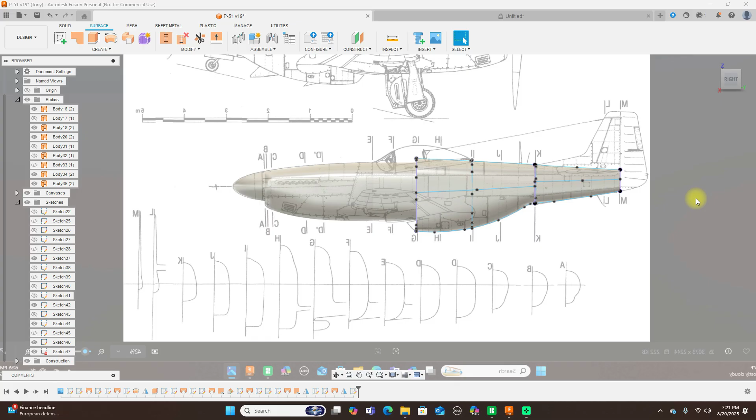Today we're going to be surface modeling this P-51. Earlier last year I showed you guys how to model a P-51, some of it, but I didn't finish it because I really wasn't happy with it. So I went back to model this one, and I'll show you guys how to do this up to where I've gotten so far. This is the hardest part right here, which I'll show you how to do in the second video, because it's going to take a little while to get this shape. So this is what we have so far.

Okay, let's go ahead and get started here. So we have the picture in here already. Now we don't want to put all these formers in here, because the more you put in here, the transition from one former to another won't be as smooth as it really should be. So what we're going to do is put A, C, D, and then probably put F in here to get this front section. So let's go ahead and do this.

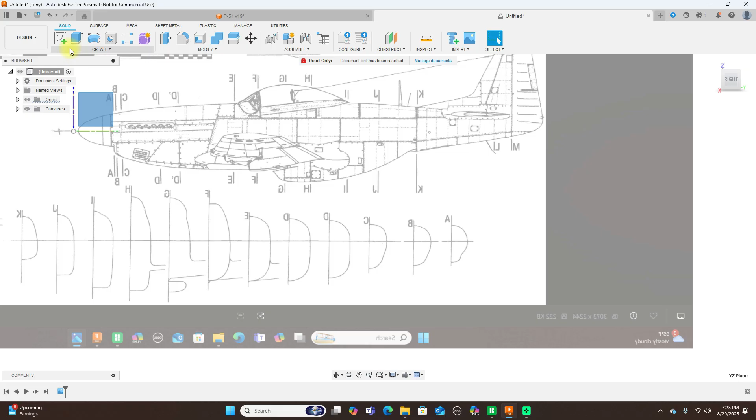So I'm going to create a sketch on this plane here, and sketch a line. These plans are not perfectly lined up, as far as perpendicular and stuff like that. Some of these formers are not like that, so just keep that in mind if you use the same set of plans I'm using.

Also, don't put as many points in here like I'm doing. Like I said, when I do this, it's just for speed, and that's it.

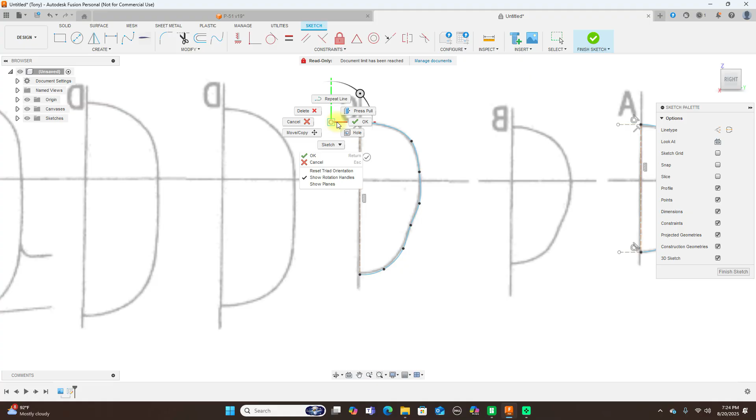Then I'm going to do C. Then D, I'm going to put the back one here, a D, not the front one.

And like I said, these are not completely lined up because this line is vertical. You can see this is not the former, is it?

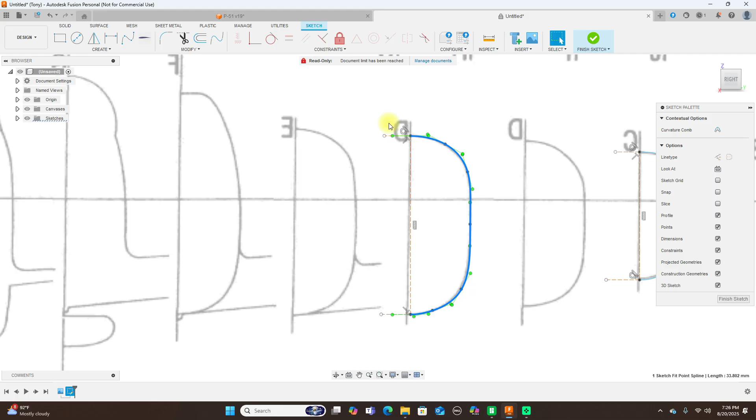Then I'm going to put this one all the way back to F here. Since the canopy is going to be done later, I'm just going to put a line from here to the bottom down here. Then move this down to here.

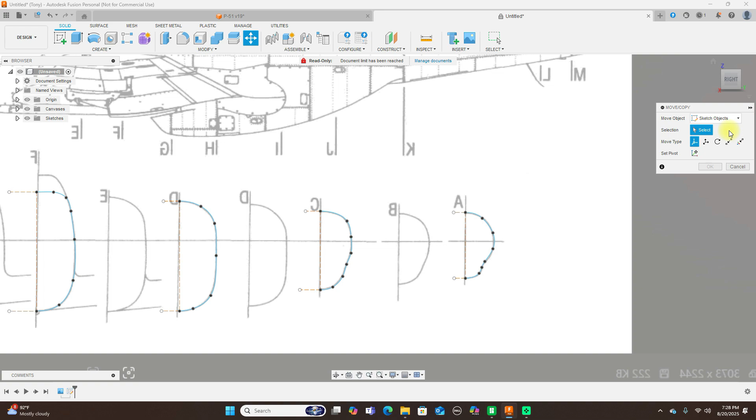And there's our first 4 formers. Then finish sketch. Then I'm going to move these, zero this out over here, and make sure to select all the geometry, and also make sure that you select this as the center.

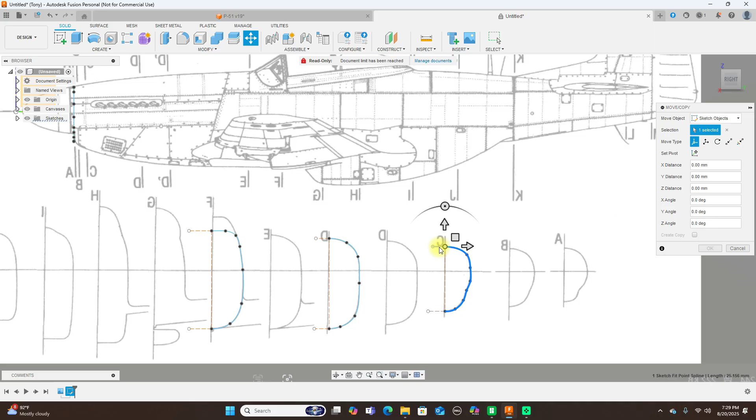Same thing with C here. Then D. And F.

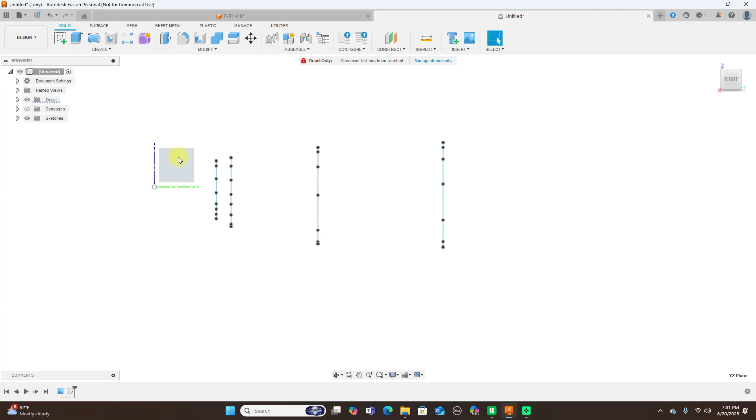And here's the shapes, our splines so far. Create a sketch on this plane here, then we're going to project points, and click OK.

I don't know why I did that. We don't want this.

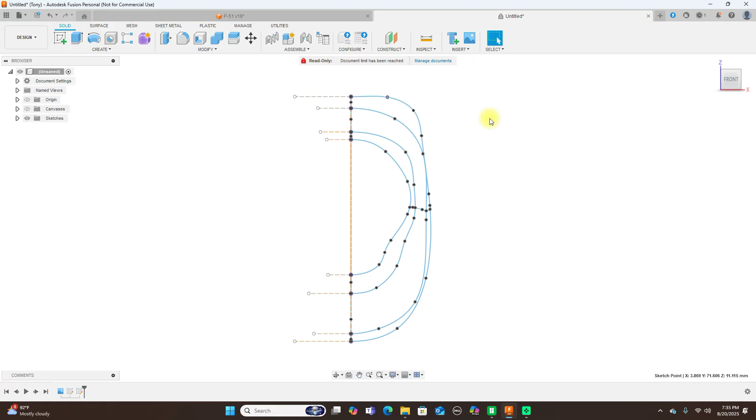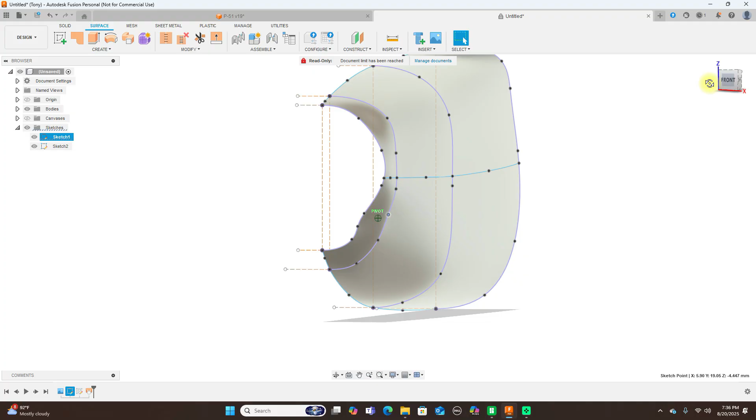Now let's see what this looks like. Zero this out. Then add rails. And this looks pretty smooth, and that looks pretty good.

Now I'm just straightening some of this stuff up to make this look smoother. As you can see, it's looking a lot smoother now, the transitions and things. So what I'm going to do now is the spinner.

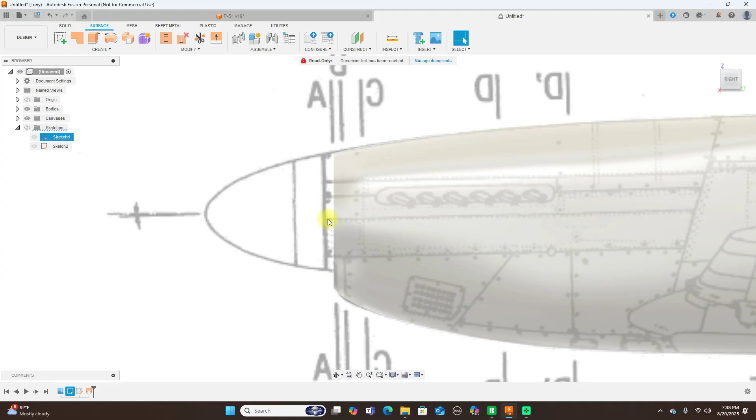Now the spinner starts up here, and if you notice, I didn't extend this up through here. The reason I did that is because I can make this whole thing, the spinner, then cut this, split this, and then attach this front to here.

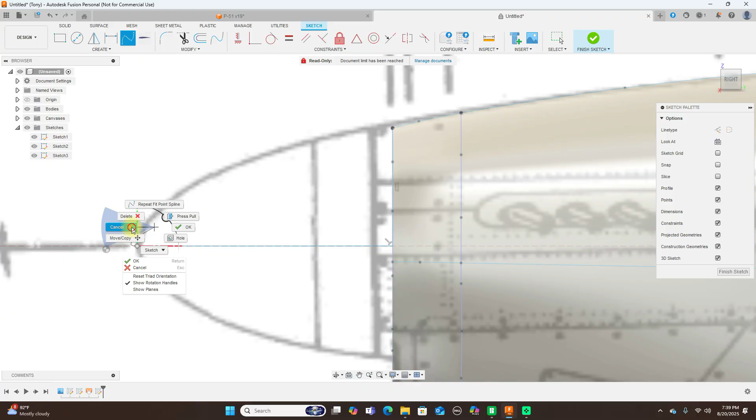So, create a sketch on this plane here. It's a spline tool. Finish sketch. Turn the sketches back on. Then we'll use a revolve.

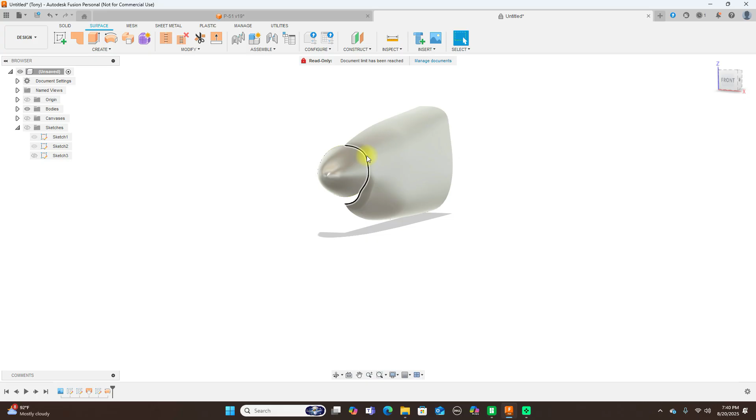Then what I need to do is come back in here and move this to match this up front. It looks like a little face in there.

Now I'm going to mirror this piece here, and we have the front of this P-51.

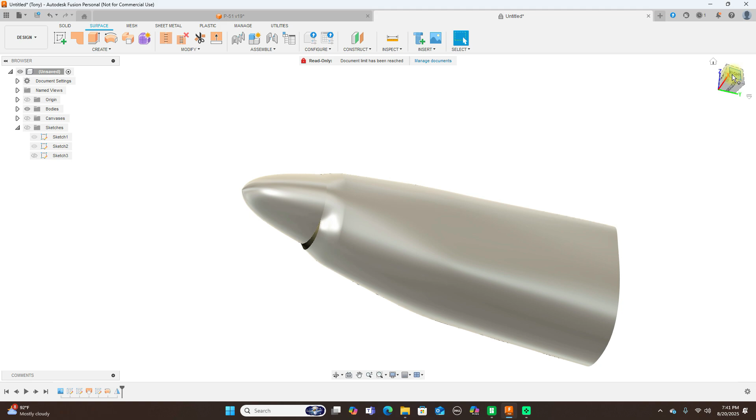Now what you can do is put more rails in here to pull this out a little more and to give you more control. You can put one down here too, 2 more rails to give you more control. But this is how you go about doing this.

And if you notice too, something that I do, let's go back to the sketches, turn the bodies off. We have our sketches here, and you see these lines here, and I make these tangent all the time, you know, to the profile shapes.

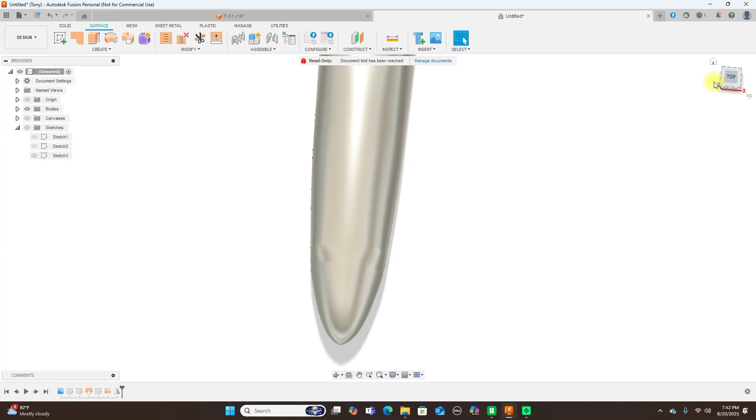And the reason I do that is because when I loft, or mirror the shapes over, it gives you a nice seamless transition like here. Even though these are 2 pieces, you don't see a line in between here. That's the reason I do that, so that it gives you that nice smooth transition. It looks like one piece.

And I'm going to put a rail up here, one more rail, and see what this looks like with another rail. If I don't like it, I'll just take it out. Well, it doesn't matter, I've already lofted.

So create a sketch on this plane here, and put one right up in here.

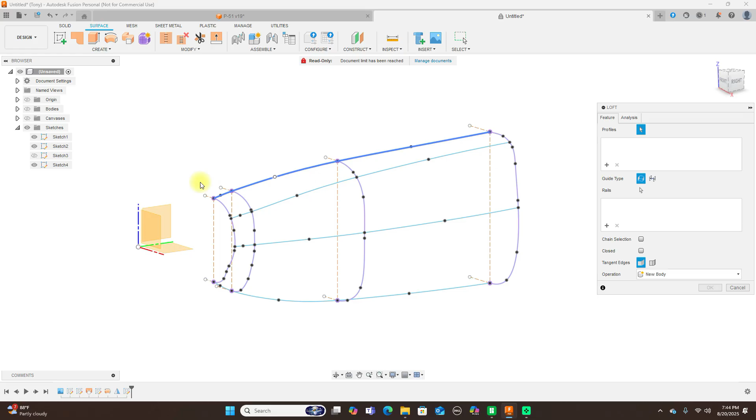Okay, let's look, see what this looks like now. Zero this out again. Okay, that's a little smoother through there. Excuse me.

Now I'm going to put another one down through here. So I'm going to delete this, go back here, and edit this sketch.

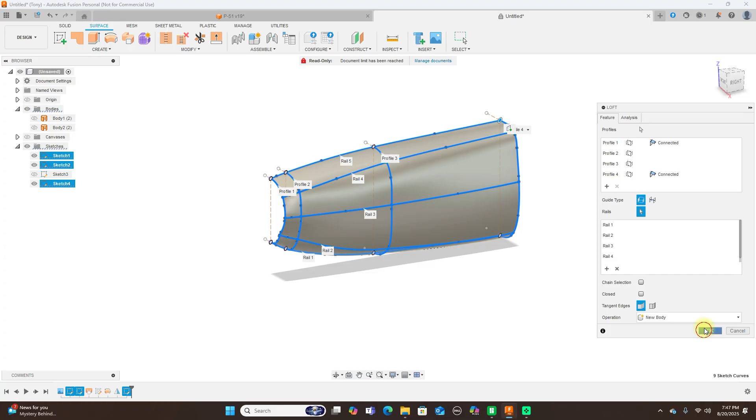Okay, finish sketch here, turn the sketches back on. Then add the rails. And that looks good too.

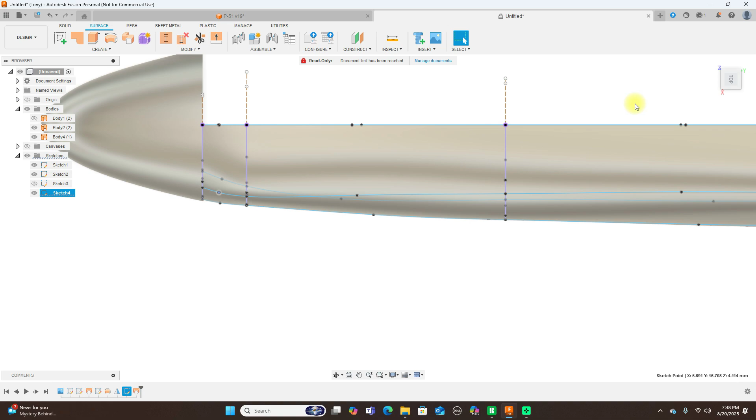And that looks really good now. Now I'll go ahead and mirror this again. Now we have that nice shape of that P-51.

And like I said earlier, you don't need all the formers. The less formers you use, the smoother your shapes are going to be. And I only use 4 for the front here.

Now what we can do here, let's see, the shape here to here, and from here to here. Let's see the best way we can do this.

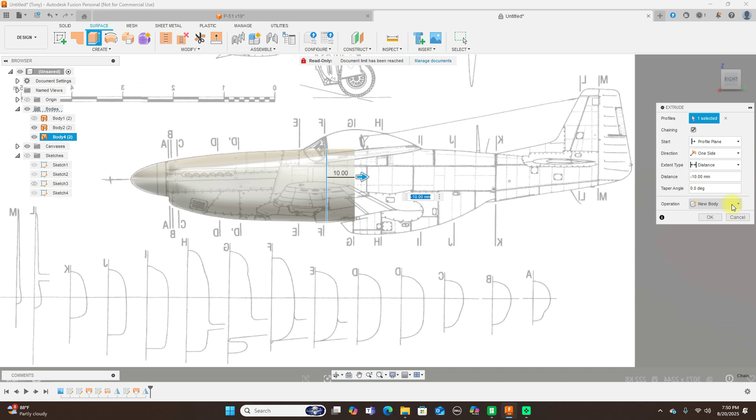This profile here back to there. And we have that now. And that looks really good too.

Now H is this one here. And I don't want to put the canopy in here.

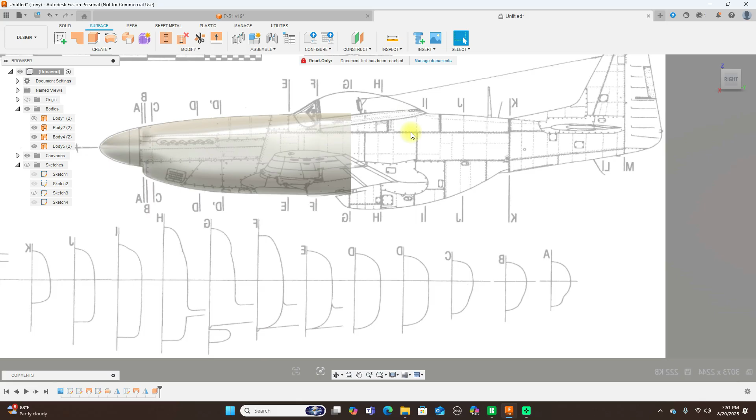So what I'm going to do is just draw a line on this plane here, or sketch a line. H is, imagine this coming straight back here, and down to here. Then moving this down to H.

And I'm not worried about the wings right now, so don't put that in there at all.

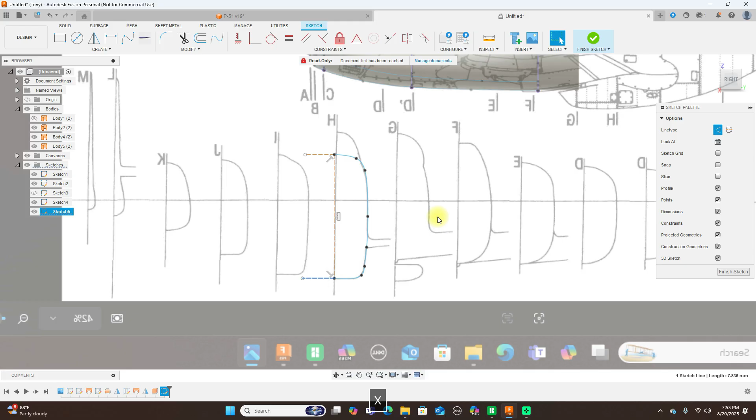Finish sketch, turn the sketches back on, and then we're going to move this. Select all the geometry. Then move this up here.

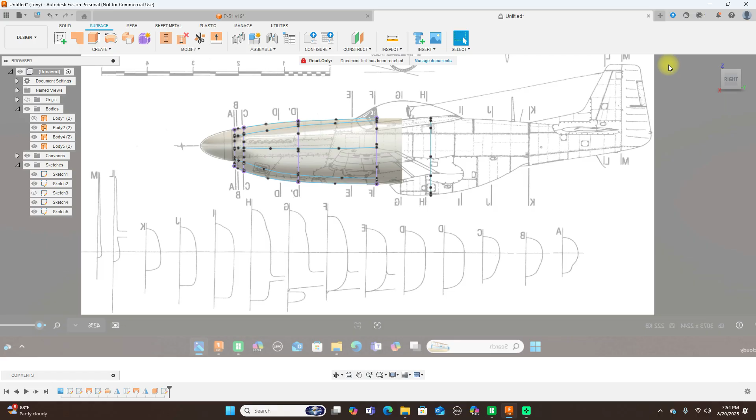Turn that piece off for now. Now what I'm going to do here, I'm going to use a plane at an angle, use this, click OK.

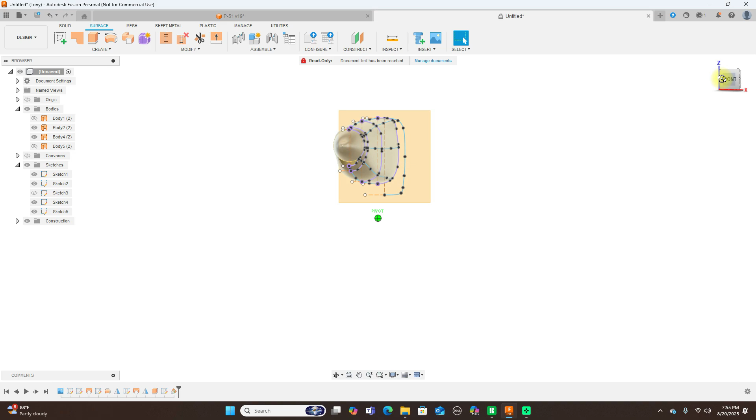Then I want to project this onto the plane. Click OK.

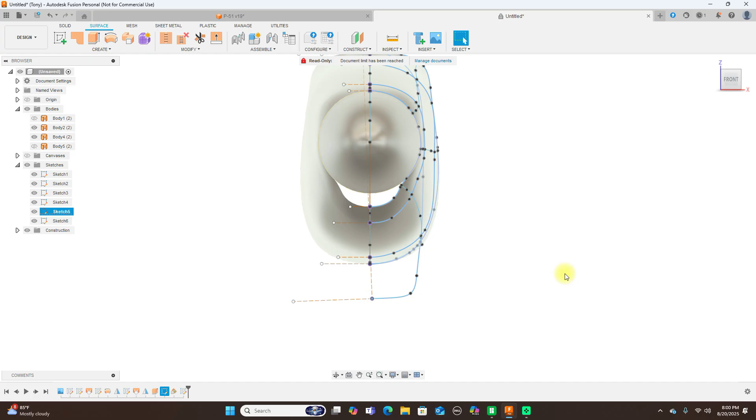Okay, let's see if we can loft this now. Don't want the whole thing, and it won't let me do that.

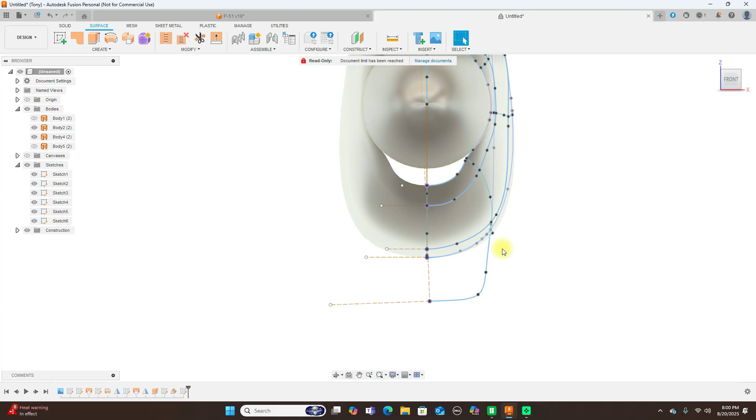So what I'm going to do here is just sketch this.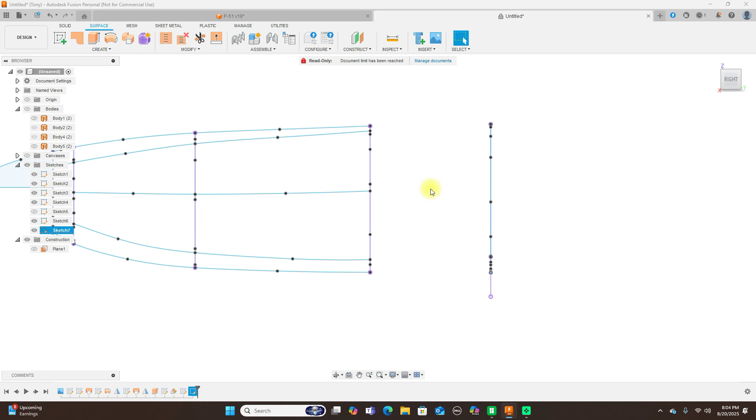Okay, now we have that. Turn those sketches back on.

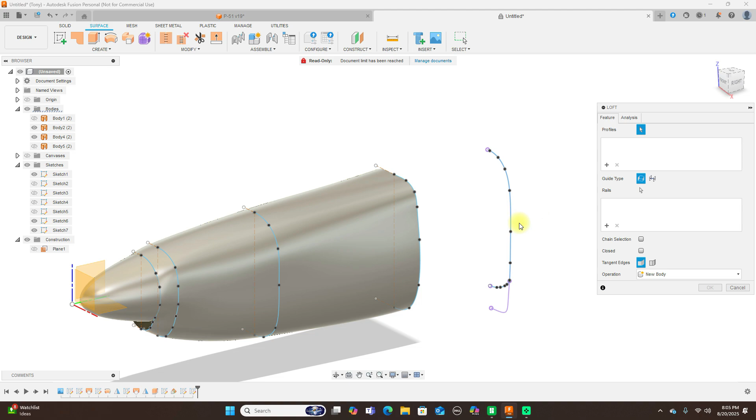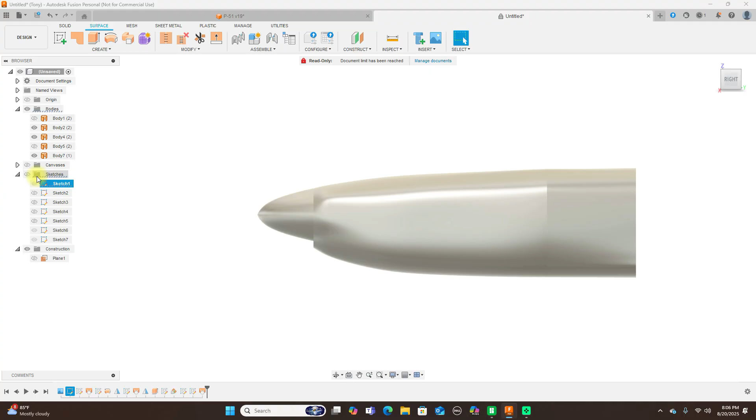Now, you can see we need some rails in here. Maybe not. Okay. And this is our P-51 so far.

Mirror that. And move back a little further. And now I'm going to put K in here.

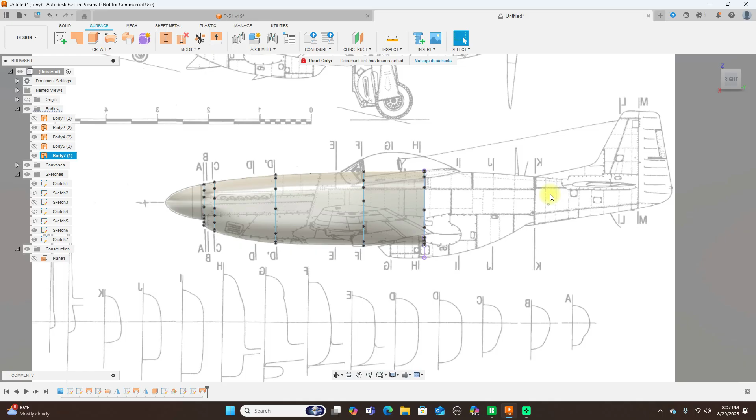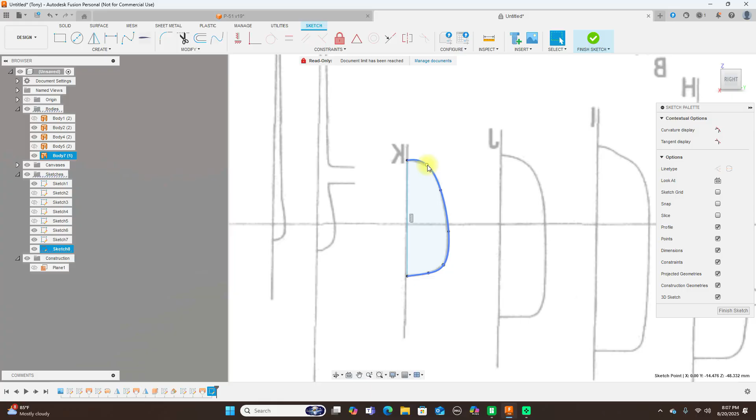So create a sketch on this plane here. Sketch our center line. Then move this.

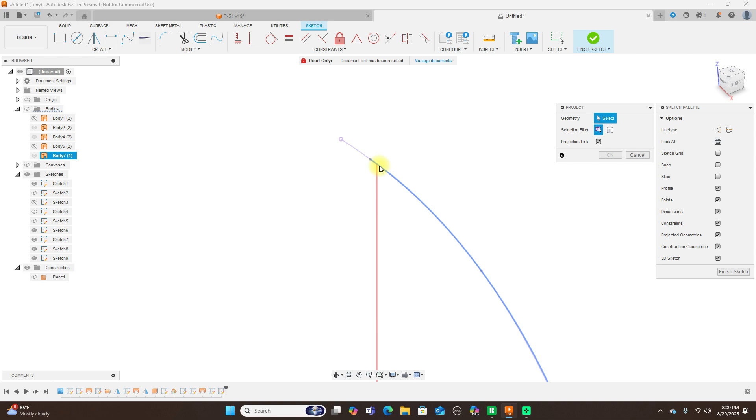Create a sketch on this plane. And project a couple points here. Cancel this for a second.

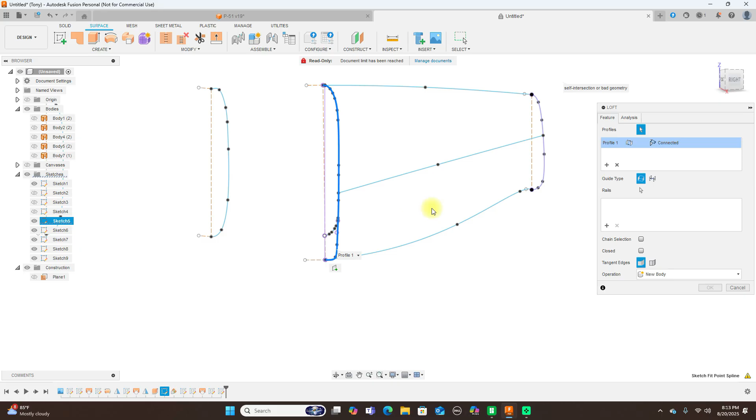And let's take a look at this. Not sure if this is on the right line. Oops. And we can see that's not touching down here.

Let's see if this one's touching. No. Okay, so we go back. And take a look at this.

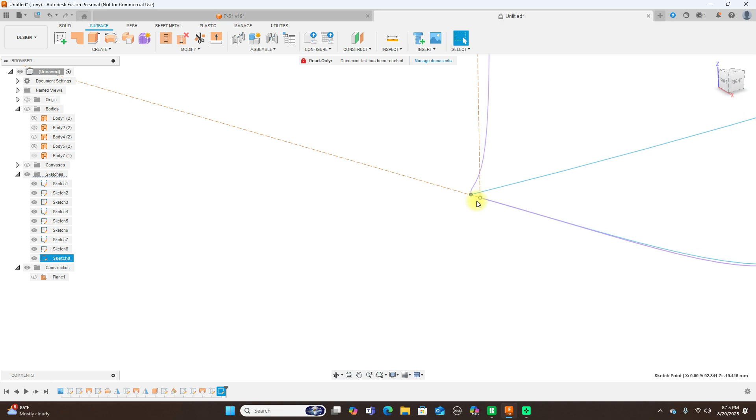As I take a look at this, we can see this is not touching the line there. We need this to touch this line. So what I'm going to do here is just erase the bottom one.

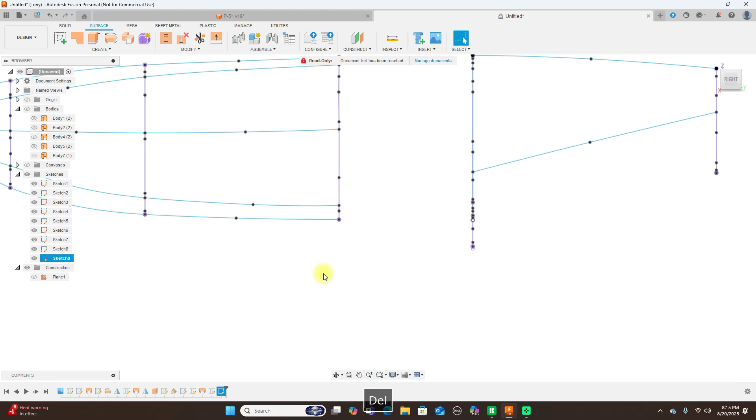Go back to here. And erase this one. See if we can snap this onto the purple one.

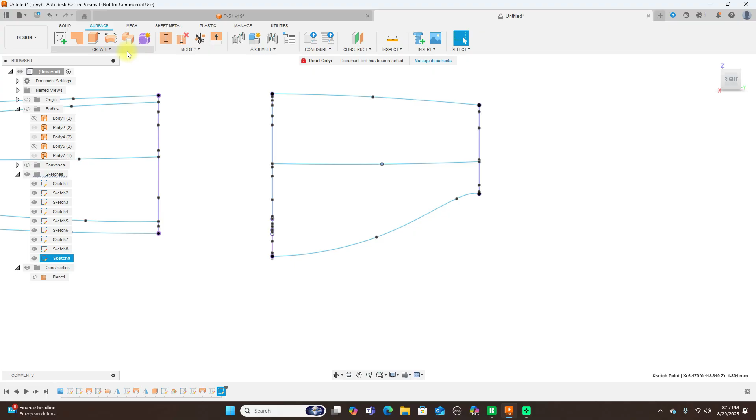Okay, let's see if it'll let us do it this time. And click OK. And we have that piece there, and that looks really nice too.

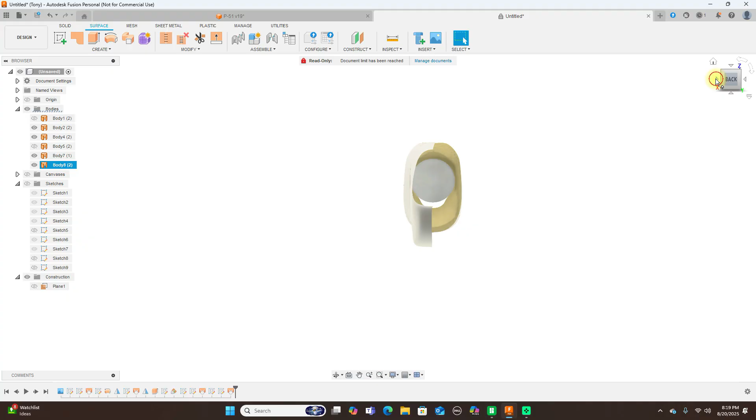Now this does two colors like this because this on the bottom here is not connected. But this is what we have so far.

And probably could have put H back here too, the top, and then loft it all the way through here, which would give us a much smoother transition where you wouldn't have this here, this little break right here would be all the way back. But this piece here is fine.

So when you're doing this, my suggestion is, like when I put this piece back here, just go ahead and loft all of these all the way back, and that'll get rid of this little section right there, which you don't want.

But yeah, that looks really good now. I'm much happier with this P-51 than the other one that I was working on, showing you guys how to do that.

But again, I was thinking here, since G is here already too, I could have just put G here all the way down here, just put a line here and down here and put G there. And then I could just loft from here to here to take care of this piece up here, but that's no problem.

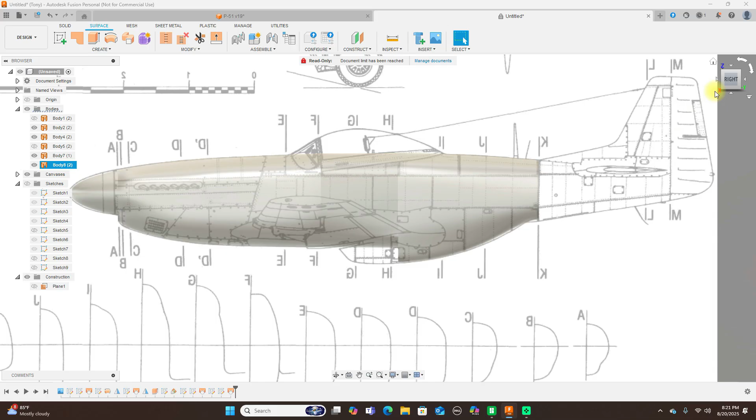That can be taken care of later too again. Yeah.

But anyway, that's going to do it for this video for now. I'll be coming back to this in a week and showing you guys how to finish this P-51 up and the Stuka as well.

So yeah, that's going to do it. So I will catch you in the next video.